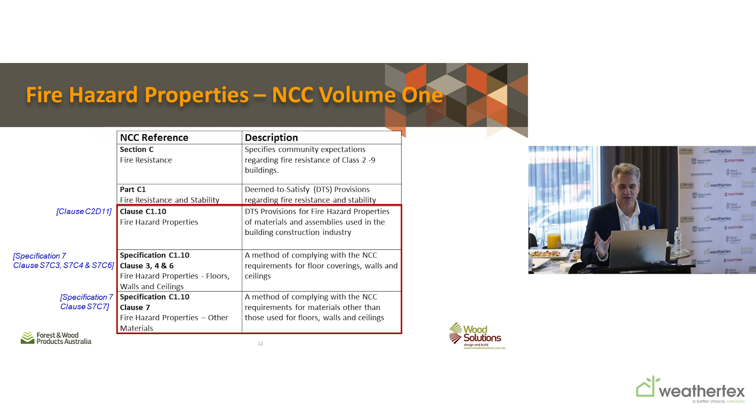If we're looking at timber joinery, such as windows, handrails, anything internal, skirting boards, cabinetry, etc., there are no requirements under the National Construction Code for use within buildings. The key thing that I'll focus on are the floor, wall and ceiling linings. So I'll go with the current clause, which is Specification C1.10.

Just to be clear, the NCC 2022 hasn't been called up yet. I understand that in the next day or so the ministers will make a formal decision as to the call-up of the NCC. I'm going to divert my discussion a little bit. The key issues being discussed are condensation matters and thermal efficiency, whether or not we go full 7-star energy efficiency for housing across the country, or whether some states pick it up and others don't. So they're the sort of decisions that we'll find out in the next couple of days.

But as I said, my focus will be on the wall and ceiling linings. There's another clause that talks about using timber products in other applications, which I won't touch on here, which require fire hazard indices, and the industry does have that information as well. But I'll focus on wall, ceiling and floor requirements.

So when we're looking at floors, one of the key aspects you look at is: is my building sprinklered or not? If your building is sprinklered, then for floors there's a critical radiant flux requirement. If there isn't a sprinkler system throughout your building, then you've got to achieve your critical radiant flux as well as what they term a smoke development rate. And I don't need to worry about those too much. I'll show you that in a moment.

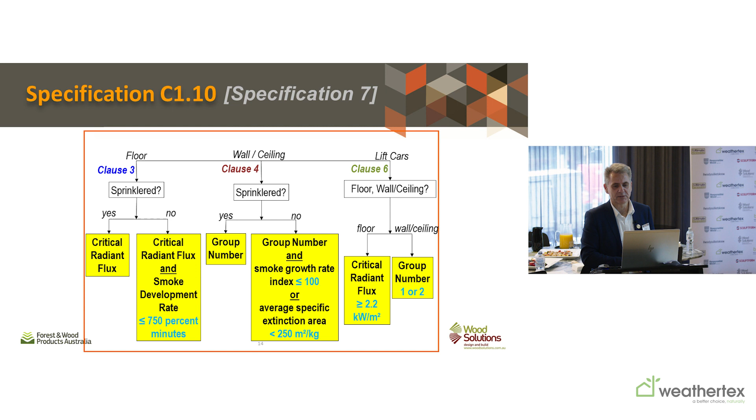For lift cars, again, the requirements are a critical radiant flux value on the floor and a group number on the wall or ceiling. And I'll talk about these in a moment. So if we focus on the wall and ceiling linings, what do these group numbers mean? Group 1 is a material where, if there's a fire in your building, you don't get that massive flame and blowout, the flashover where everything ignites at the same time. Group 2 doesn't reach flashover within this test protocol within these periods.

Now, from a timber perspective, we do have products that can achieve Group 2. Group 1, no. In effect, with Group 1 you start to think about non-combustibility. Now, Group 3 is basically a cover-all that covers the vast majority of timber products. So timber products will generally achieve a Group 3. There is a Group 4 rating, which isn't actually used in our National Construction Code.

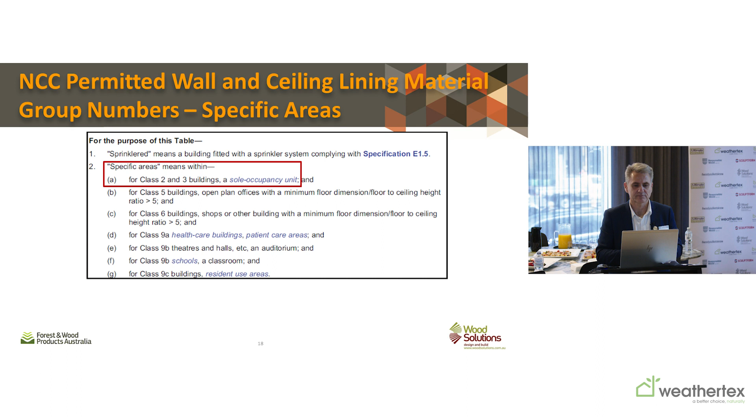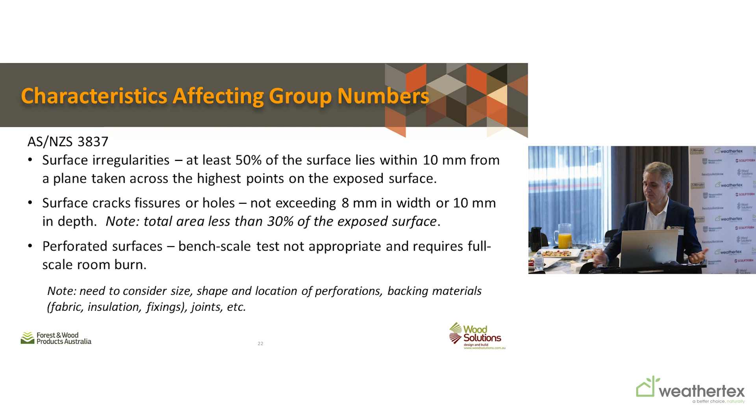Once you start to put penetrations and holes through them, you sort of get outside the test method requirement, which details what the limitations are, and you end up having to do a full-scale test. So these are the sorts of panels that I'm talking about, when you've got various holes and slits and penetrations through that panel. You end up having to go through a full-scale room burn.

We basically line the room on three sides with your product, as well as the ceiling. They put a fire in the back corner, and then they just measure all the smoke that comes off and how long it takes, if it does, to flash over. So all that stuff's measured. But it is an expensive test to do.

But once you start to go away from solid wood or solid finishes, that's the only pathway you have for compliance purposes. And then when you do this type of test as a room burn, you need to look at what's the makeup of my system. So it's not just my panel with holes in it. What's behind my panel? Have I got any acoustic fabric behind there? Is there a fire-rated material behind there? What's the support mechanism? So that's probably a bit of background for those that are potentially thinking of going down that path.

You really got to think clearly about what you're going to test, because at the end of the day, the test lab will say, this is what we tested. And then you go out on site and say, I'm not going to use my steel battens, I'm now going to put timber battens of this sort of dimensions and size. The lab will say, we have to do an assessment of that. You can't just use our other test report.

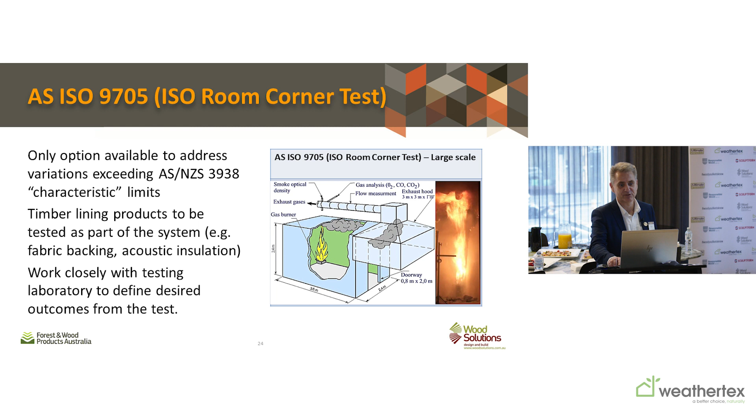And that may work in your favour or may not, but I'm just flagging, when you test, you need to really think clearly about what you're going to test, because the testing lab can only say, this is what we tested and this is how it performed. So I suppose work closely with the labs, as we do every time we go do a test. So that's about walls and ceilings, linings. Now we'll focus on flooring products.

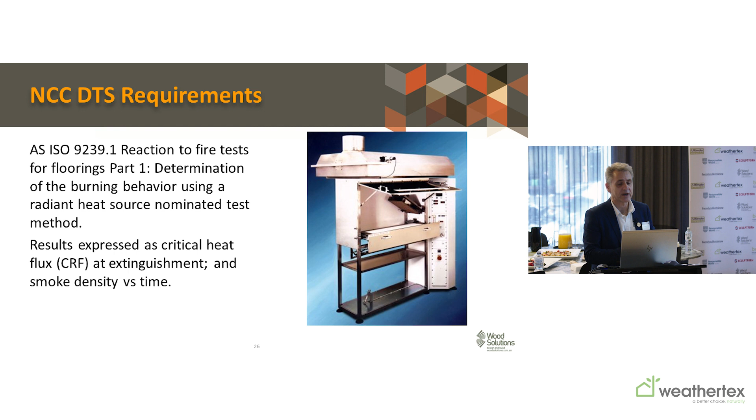And inside the report, you'll see various options. You can install your timber flooring, like in this studio, over the top of a substrate, be it concrete or particle board or whatever. Our tables are broken down in that same regard: is the timber flooring installed over a substrate, or is there an air gap behind? Because that can have an impact in terms of burn through the floor and how that performs as a system. Our reports make clear how those values have been provided, either installed on a substrate or not.

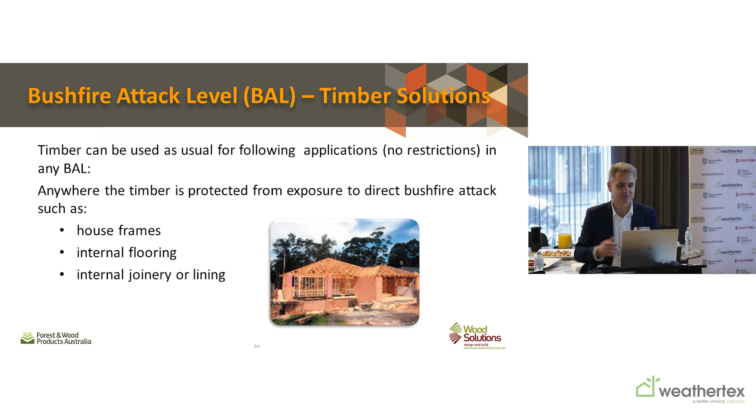The bushfire standard is all about stopping the embers and the heat getting into the structure. So the external cladding and systems protect the frames in the lower BAL levels. As we go to the higher ones, we then use systems to protect our frames. So this is just a very quick summary. Doing a bushfire presentation, I can spend an hour just on that. But I just wanted to give you a quick run through.

So at the low levels, there's a bushfire attack level low, which basically means you're not really in a bushfire attack level, but there is a category, let's call it that. But I'll focus on the areas where you need to do something. So when you're looking at window and door applications, there is a density requirement, so minimum density of 650 kilograms a cubic metre. So for those of us here in Victoria, Vic Ash is a 650 kilogram a cubic metre material, so it can be used in the lower BALs as our window joinery.

Then as we move up into these higher density species, so anything that's got 750 kilograms a cubic metre or greater, you can then use that as external wall cladding under the deemed-to-satisfy provisions. So in the BAL 12.5 and BAL 19 levels.

When we move up to BAL 29, which is sort of, I'll call it, the cutoff for the simple deemed-to-satisfy pathway for timber, we've got 7 nominated hardwoods that can be used as achieving BAL 29. And those hardwoods went through a testing program over 20 years ago now to enable them to get into the standard. There are products now that are fire retardant treated that can be used in bushfire areas up to and including BAL 40. So these are preservative treated and fire retardant treated radiata pine products.

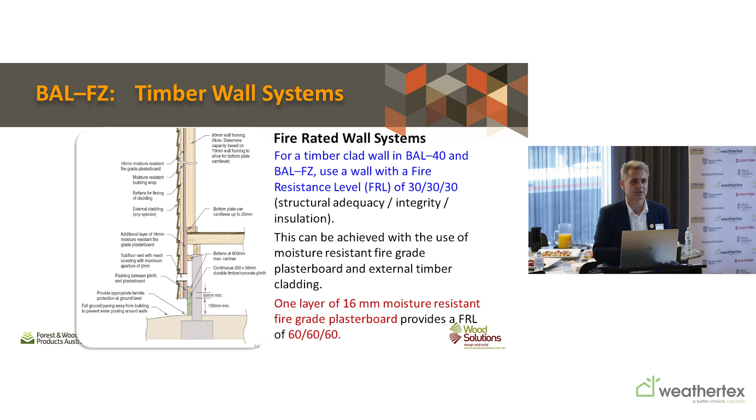But there is also a timber roof system that was tested, and it was tested by Forest and Wood Products Australia. When the bushfire standard was first released, there were no solutions at this level, the flame zone. They had a test method, but no one had the opportunity to do a test. So the industry went out and actually came up with a roof system. This is just with a corrugated or steel type roof on top. And again, it uses fire-grade plasterboard.

So we had our fire-rated wall that had plasterboard on the outside. That plasterboard then extends across the eave line, goes up the face of the roof, and protects fire getting in at the eaves or the fascia, to stop any fire getting in. To stop the embers getting in, as well as any of the heat, where you've got the corrugations in the roof, there's insulation right at the junction at that fascia level. There's a compressed amount of insulation to stop any embers or any heat getting through.

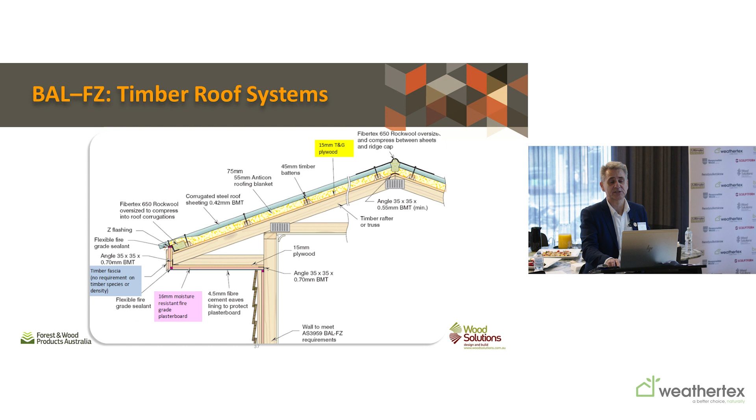And then there's a 75 mil, well, it's 55 originally, but it's 75 now, Anticon blanket that was tested, that then gets compressed and forms within that corrugation as well. So it gives you a very highly insulated roof system. As I said, this was the first full-scale tested roof system done to comply with the AS 3959 requirements.

Look, I thought going through technical stuff would be fairly heavy, so I thought I'd try and finish on a bit of a lighter note. I know we're talking about sustainability and use of timber products, and we get the feel from the studio how lovely it is to be surrounded by a lot of timber. And there are some documented benefits, and this was with Pollinate, who did a bit of work on the health and wellness of using wood and impacts on productivity. So there's been a lot of formal research looking at the benefits of using timber products. One of our speakers this afternoon, David Rawlinson, will talk more about this.

So I'm just going to give a quick grab, because if we're talking about putting timber linings and timber flooring in a building, why would we bother doing that? That's because we want to have that engagement with the environment. We love to be surrounded by natural products. And it's shown that there have been some real positive benefits on learning, particularly with children. I talked about mid-rise buildings. Every time I talk or think about this, there's this one photo I saw of a cross-laminated timber building that was done in the UK.

And it's done as a school building, and they had this really beautiful cloud window cut out, and then they had a photo of children at a desk. They were really young, they might have been 7 or 8, just playing around, and it really gave, almost like this photo, this really engaging feeling in using timber products.

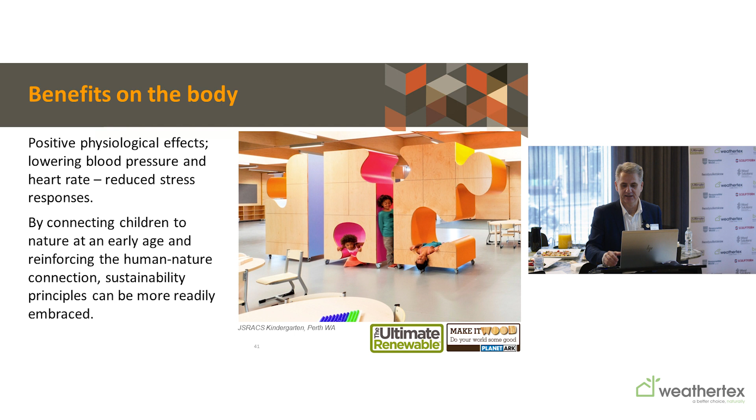And we do have that innate need to be in contact with nature. But it also shows some benefits in sort of reducing stress on the body, has the ability to lower heart rate and remove that stress. So there are some real positive benefits in using timber in terms of our built environment.